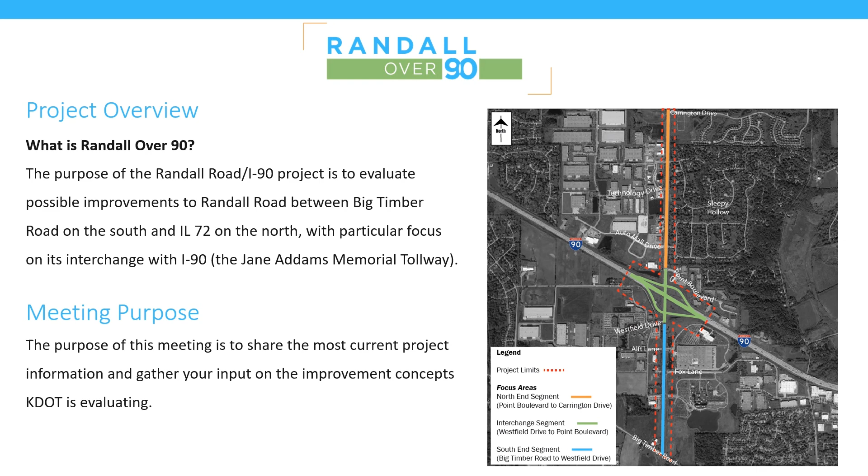The purpose of the Randall Road at I-90 Corridor Improvement Project, which we call Randall over 90, is to evaluate potential improvements to Randall Road between Big Timber Road on the south and Illinois Route 72 on the north, with a particular focus on the interchange with I-90, the Jane Addams Memorial Tollway. The purpose of this public meeting is to share the most current project information and to gather your input on the improvement concepts that KDOT's evaluating.

This project started in fall of 2019. Since that time, the project team has collected data, held an open house, and developed the project's purpose and need statement. We've also developed and are now evaluating a wide variety of potential improvement concepts. We're currently in that concept evaluation phase. We're developing a final report to publish and share later this year.

The key content of the final report will be a list of alternatives to be carried forward. This is an official term comprising a selection of our design concepts, which were found to be most successful at addressing the many needs of the corridor. Those alternatives will be whittled down to a single preferred alternative in future phases of design.

Let's go into a little bit of detail on the progress KDOT and the project team has made since that previous public meeting a year ago. Since February 2020, the project team has received and analyzed approximately 250 survey responses and comments from stakeholders and the public, including those of you who live in the project area. Armed with your feedback and with the data collected in those early stages of the project, we then developed and shared this purpose and needs statement.

Last fall, KDOT transitioned the project to what is referred to as a planning and environmental linkages strategy. That's a variation on the federal design process, which I'll explain in more detail later in the presentation. After we finished collecting our data and input and then reestablishing the project as a PEL, we began designing concepts which had the potential to identify those issues that we found, including those we learned through our conversations with you.

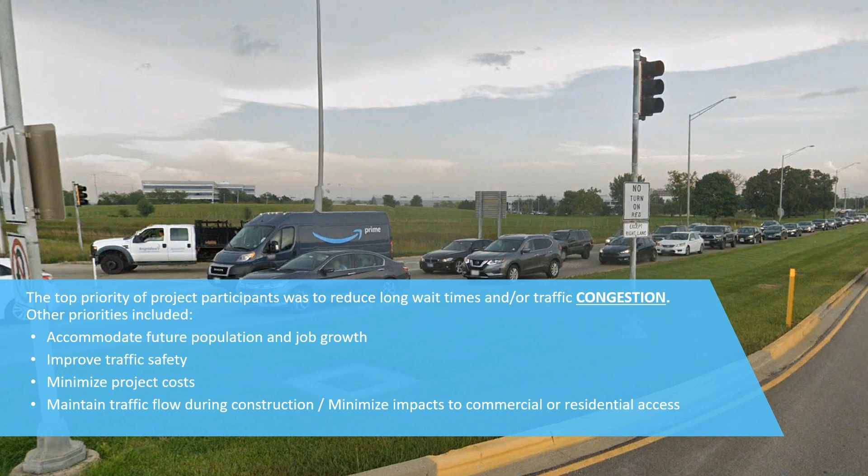Now let's dive in a little more to the purpose and needs statement which we created for this project. A purpose and needs statement is developed to define the transportation problem and outline goals and objectives. It sets the stage for consideration of reasonable concepts for improvements and provides justification for the use of public funds.

It's basically a vision statement for what we're trying to achieve. The FHWA requires a properly developed purpose and needs statement if federal funds are to be used for a project. For that reason, a wide variety of information, including public review and input, goes into developing it.

Our project's purpose and needs statement was presented for public comment in February 2020, after our last public meeting and after our data collection process was complete. You can view that entire statement on the homepage of our project website.

Just to reiterate what's in that statement: the purpose of this project is to develop one or more infrastructure concepts which enhance mobility, improve safety, support current and future travel demand, and address economic and quality of life impacts throughout the corridor. The need for this project is to relieve congestion, improve travel times, and provide for expected traffic growth.

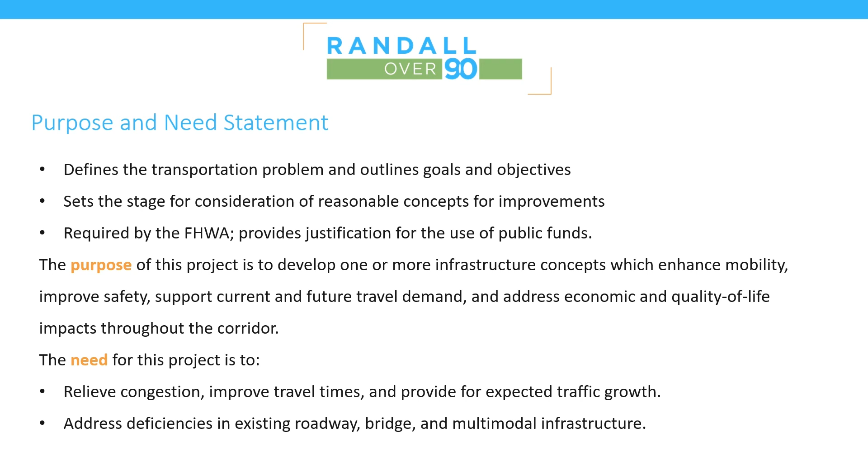This project is also needed to address deficiencies in the existing roadway, bridge, and multimodal infrastructure.

Now, last fall, as I mentioned, KDOT transitioned from a feasibility study to what is called a Planning and Environmental Linkages, or PEL, strategy. The goal of a PEL is to develop a more seamless and informed decision-making process that reduces duplication of effort and promotes environmental stewardship.

It also enhances community involvement and streamlines the delivery of the project. A PEL strategy provides us with a strong base of information for the environmental review process, which makes it easier for us to identify potential concerns early on and address them more effectively.

By making this transition now, KDOT can ultimately lower the cost of the project and shorten the timeline for both project development and environmental review.

Now, the design process had a specific starting point. We didn't want to start creating any designs until we'd finished the data collection process, which included the gathering of public input, and until we understood the corridor as best as we possibly could. It's important to have that basis of knowledge before we actually start thinking about what we would want to do.

Now, we knew from the data collection process that there were specific things we should be trying to achieve. We knew, for example, that a lot of the traffic signals, the frequency of the signals, is what does a lot to cause the congestion and backups, which in turn is a safety issue because it causes rear end crashes.

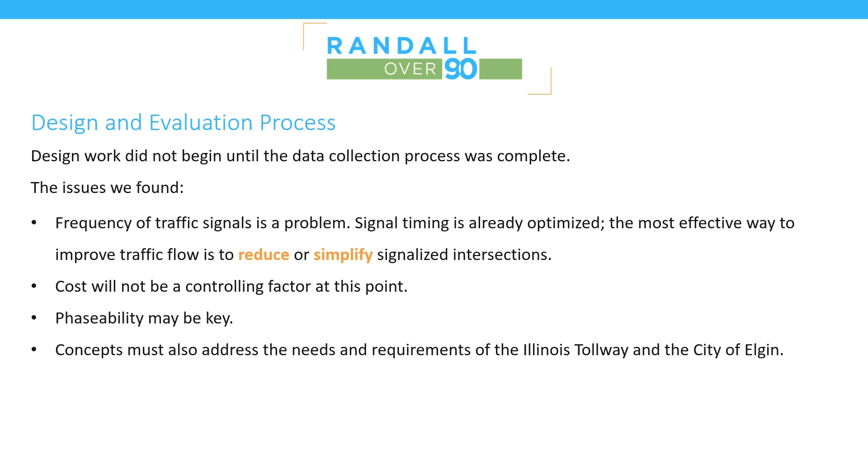Accordingly, we focused on that issue in trying to find ways to address the purpose and needs statement and make the project more effective. A thorough explanation of our approach to intersection simplification is available in our video, which is currently online, on concept criteria. Now let's go over how our team developed the concepts that you'll see today.

First, the project area was divided into 3 segments. Those 3 segments are the south end from Big Timber Road to Westfield, the I-90 interchange area, which is basically from Westfield through the interchange north to Point Boulevard, and the third segment from Point Boulevard north to Carrington Drive.

The intersection of Big Timber Road and the intersection with Illinois 72 are part of separate improvement projects currently being pursued by KDOT. Over 20 distinct improvement concepts were initially developed for those 3 segments.

Each of the improvement concepts was screened through a fatal flaws analysis. Fatal flaws are just that: things that are so severe or so impactful that anything that causes them is basically a non-starter. Residential displacements are a fatal flaw, as are exorbitant cost, major maintenance concerns, and very, very poor traffic operations, as defined for our analysis.

As a result of that screening, the design team removed 7 concepts from consideration. More information about concepts that were eliminated through fatal flaw analysis, if you're curious, is available on the project website.

Next, we created 12 weighted evaluation categories. A detailed explanation of those evaluation criteria is available in a separate video on the randallover90.com website under the heading Resources. Weights were assigned to each criterion based on the priorities they met within the purpose and needs statement. All categories for each concept were totaled for a final score. That score will be a key determination in whether a concept is retained or discarded at the conclusion of the process. Scores for concepts within each segment are only compared to others within that segment.

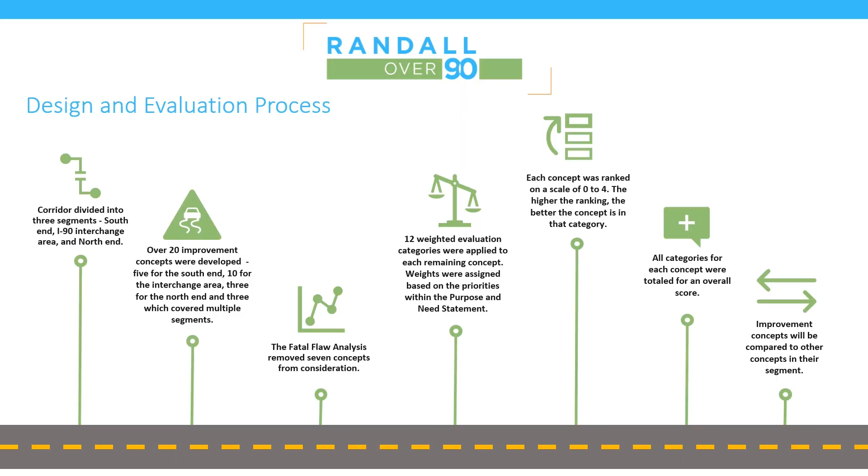So let's get into the improvements that we're actually considering. We'll start on the south end of the corridor, comprising the segment from Big Timber Road to Westfield Drive.

Let's start with what you can see out to the south end today. The portion of existing Randall Road shown generally consists of 2 northbound and southbound through lanes in each direction, with a 3rd lane northbound between Capital and Alft. This segment has several existing issues, including closely spaced traffic signals, congestion, and high left turn volumes, especially at Alft, which conflict with through traffic.

Traffic flow is further complicated by emergency vehicles arriving at Advocate Sherman Hospital, which tend to preempt the traffic signal timing and confuse things further. The average daily traffic, or ADT volume, for this segment is an estimated 47,000 vehicles per day in 2019, which is one of the heaviest, if not the heaviest, traffic volumes served by any Kane County highway. Early indications are that COVID's impact on traffic volumes here and elsewhere in the corridor has been relatively limited.

Now, one concept that KDOT must consider per federal guidelines is what they call the no-build concept. This means that no improvements would be made. It is rare, but not unheard of, for the no-build concept to be selected for a project. But for that to happen, the no-build concept would only be selected if all of the other possible improvements fail to address the purpose and needs statement.

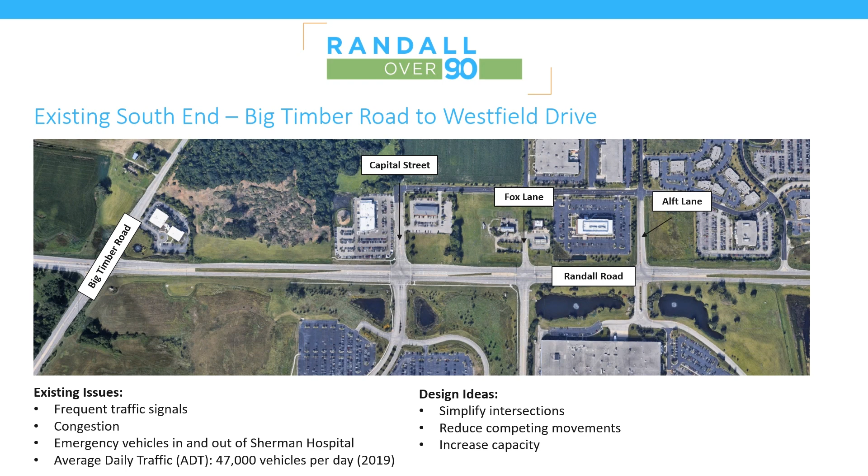In addition to the no-build, 3 improvement concepts survived the fatal flaw screening process and are still under consideration for the south end segment. Those 3 are a 6-lane cross-section, 3-leg intersection modifications, and an unusual concept at Alft Lane called an echelon intersection. I should point out that the concepts which failed the fatal flaws analysis are also relatively unusual.

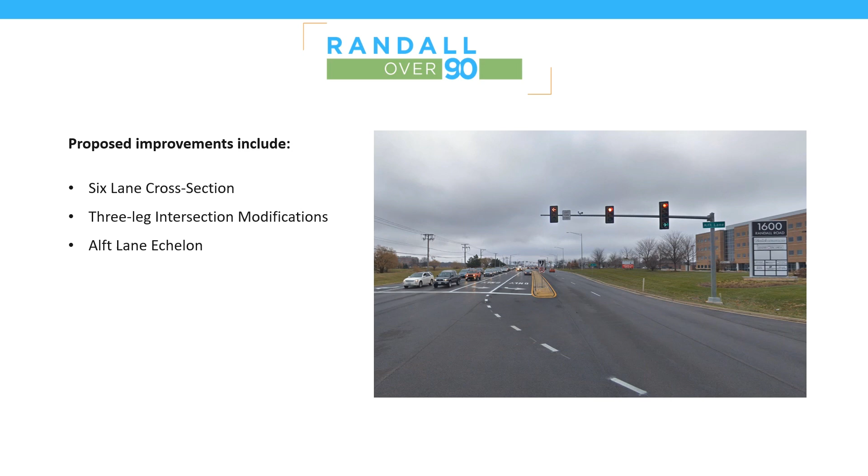Now, this narration over the next steps is only going to provide you with a high-level summary of each concept. Some features of each might not be very clear in the slide, though I'll take my time to go through them. All of these concepts can be viewed individually and in greater detail by downloading the exhibits from the project website, and I encourage you to do so.

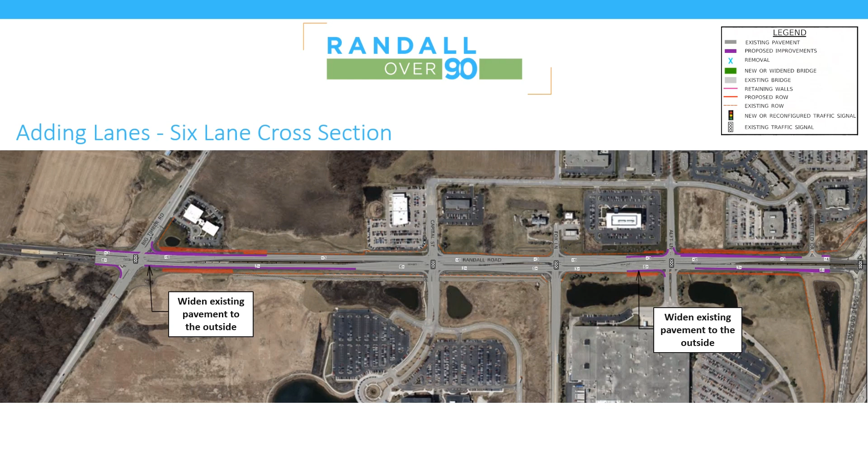The first concept we're going to look at is a 6-lane cross-section. It is the most straightforward of the different concepts under consideration. KDOT would simply add a third lane in each direction to the roadway between Big Timber and Capital Street, and also between Alft and Westfield. Turn lanes would be added, and traffic signals would be modified as needed.

Using the scoring criteria we've discussed previously, this concept was given an overall relatively low score of 43. As our traffic modeling suggests, it will not provide much additional benefit to the corridor. While additional lanes will improve capacity, they don't reduce the number of traffic signals, they don't reduce the number of other hazards currently contributing to congestion or crashes, which is why its score was relatively low.

Some other concerns we identified include the fact that the wider pavement will require long crosswalks. It is an intent of the project that we do what we can to enhance multimodal use, and a wider pavement lessens the likelihood that it will provide an attractive facility for multimodal use. There's also the fact that utility relocations will be required everywhere pavement is widened. It doesn't provide any improvement to access along businesses. It widens the road, but doesn't improve the efficiency of those access points, of those side streets, which access the businesses or Advocate Sherman Hospital. Additionally, the additional pavement will probably result in the need for additional drainage improvements.

Benefits of this concept include that it does provide some benefit in average traffic delay times. Its constructability is pretty good. Lanes can be reduced and shifted without a lot of impact to existing traffic, which allows for better construction and better traffic flow while the work's underway. This concept has minimal environmental concerns. Finally, we can widen the road and retain the pavement that we have, which will lower construction costs.

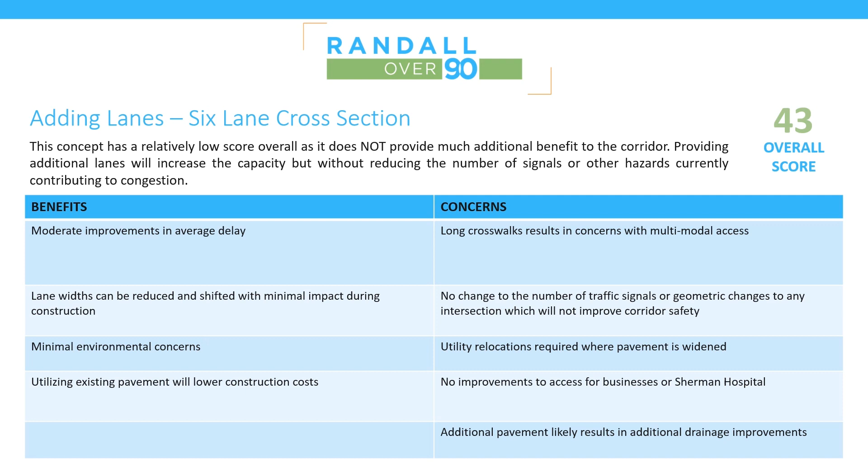Second concept I'd like to go over with you is the three-leg intersection modifications. This modification would revise the intersections at Alft Lane and at Fox Lane by reconfiguring the traffic signals at both intersections.

Under the best performing version of this concept, the Sanfilippo plant access would be via a U-turn at Fox Lane. Northbound left turns onto Alft would now use a new frontage road to cross Randall Road and make a right turn onto Alft from the north. So they drive northbound past the intersection, do a U-turn, and then make a right turn onto Alft.

As a result of doing this, the traffic signal at Alft would be greatly simplified. It would provide some additional inconvenience for the hundreds of vehicles which make that turn, but with benefit to the tens of thousands of vehicles that do not.

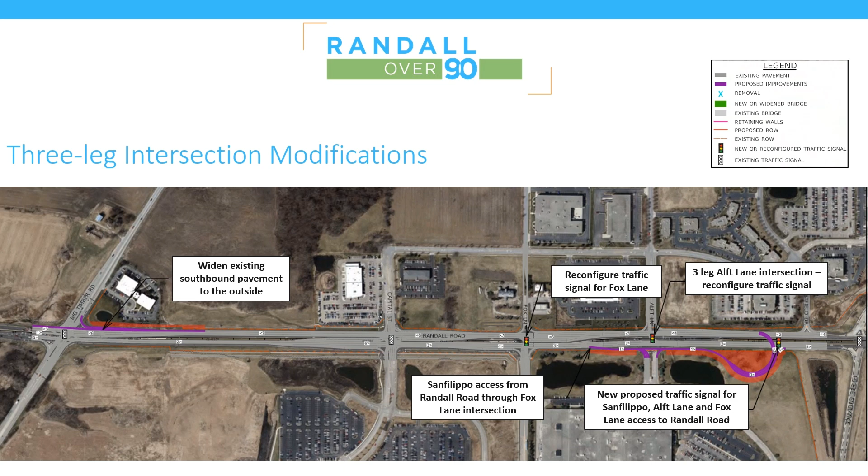This concept provides a significant benefit to the through movements, which are the focus of our study, by consolidating that turning traffic. Our modeling has determined that the two-phase signals at Alft and at the frontage road will operate much more efficiently than the one four-phase signal currently at Alft.

The improved traffic flow will improve access to surrounding businesses and the hospital, and especially for traffic turning from Alft onto Randall, as opposed to Randall onto Alft. But it does require significant right-of-way, and it does require an additional two-phase traffic signal. For more information on how that two-phase signal benefits us, I would encourage you to drop in on the traffic breakout session after I'm done speaking.

Other benefits of this concept include the fact that it provides a protected area for pedestrians to get across Randall. It enhances safety by reducing those queues which are currently forming at Fox Lane. It has minimal environmental concerns. It allows us to retain most, if not all, of the existing pavement. And finally, access to Advocate Sherman Hospital is improved with these improvements in two-phase signals.

Some concerns include the fact that we have numerous utility impacts, that we do have an issue with indirect access to the Sanfilippo plant, which will require some careful design. And finally, the amount of additional pavement we're adding will require additional drainage detention, which must be designed.

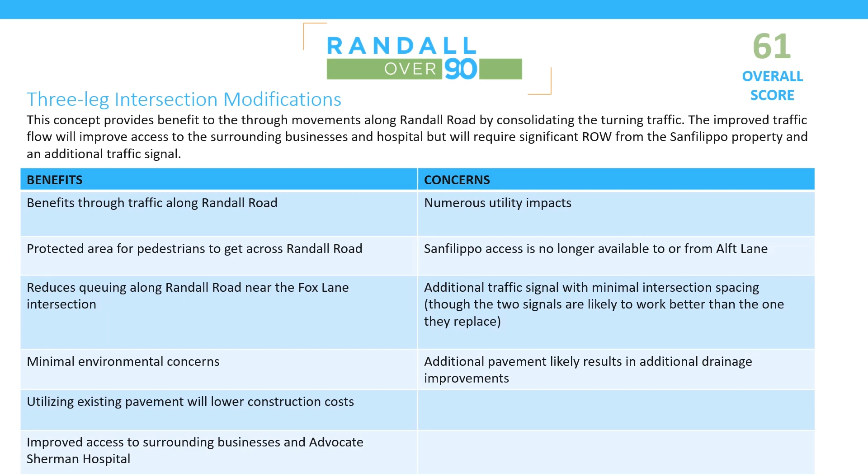The third improvement concept I'd like to cover for the south end is what we call an echelon intersection. It has a number of other names, including an over-under, if you're interested in Googling it. We're calling it an echelon. And what an echelon intersection does is it grade separates two directions of travel.

In our particular application, northbound Randall Road and eastbound Alft Lane will be raised over the existing intersection of Alft and Randall, making it essentially a double-decker intersection. Access to westbound Alft will be via a new extension of Fox Lane to the west.

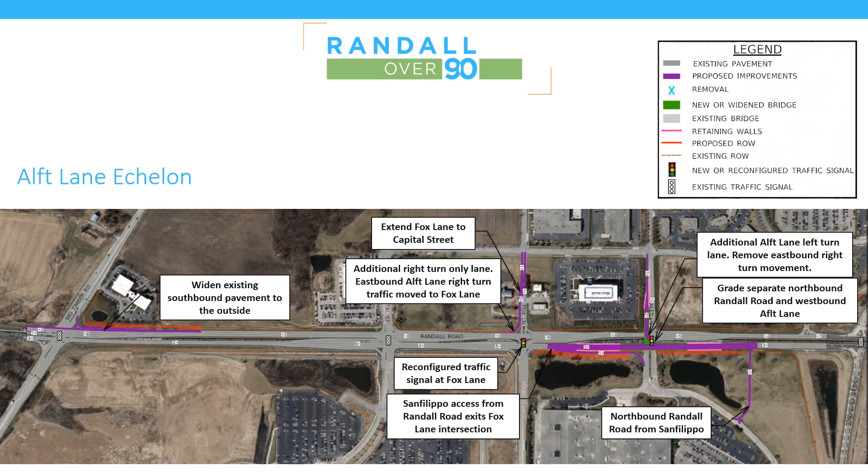This concept provides a significant improvement along Randall Road at the Alft Lane intersection. The interchange configuration, though, presents a lot of concerns. The foremost of those is that construction staging will be very complicated and disruptive in the short term. Also, the intricate bridge structure is going to create a high construction cost.

Other concerns that we have about this concept include the utility relocations, the fact that we've got an unsignalized entrance from the Sanfilippo plant, which we'll need to design carefully, and the fact that additional pavement and especially drainage for the bridge structure will result in some relatively complicated drainage infrastructure as well.

Among the many benefits of an echelon is dramatic improvements in safety and traffic flow at Randall and Alft. The movement from Alft onto northbound Randall is one of the biggest intersection movements that we have in the entire corridor. So doing something to specifically address it and specifically improve it means that this scores very highly from that traffic operations and business access standpoint.

It makes much better access for Advocate Sherman by simplifying the ground level intersection between southbound Randall and Alft. The grade separation improves the opportunity for multimodal crossing because essentially pedestrians only have to cross half of Randall to get across it. And the environmental concerns are relatively minor.

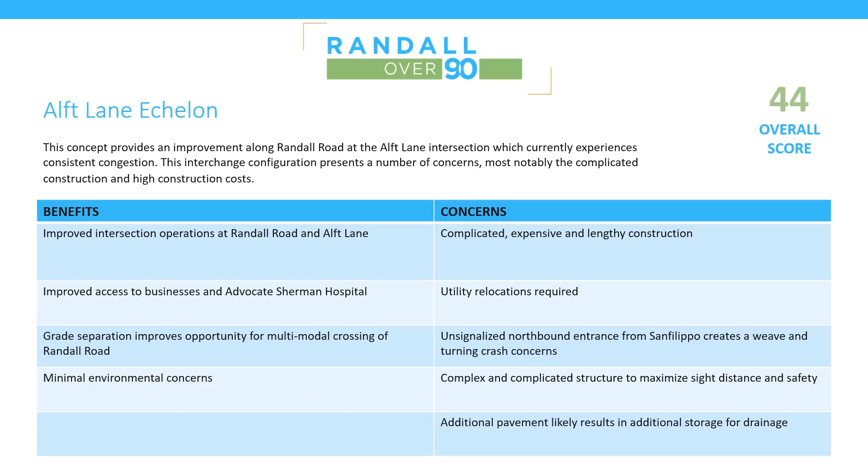As stated earlier in the presentation, all of our improvement concepts are compared to other concepts in their segment. The three-leg intersection concept scored the highest. Next was the echelon, followed by the six-lane cross section. And the no-build concept ranked last with an overall score of 44.

It's important to note that these scores do not include public input, which you will be invited to provide via our online survey. This concludes the presentation of our South End improvement concepts. You'll have the opportunity in the survey to make specific comments about what you've learned about the South End concepts, and I encourage you to do so. Let's move on to the next section.

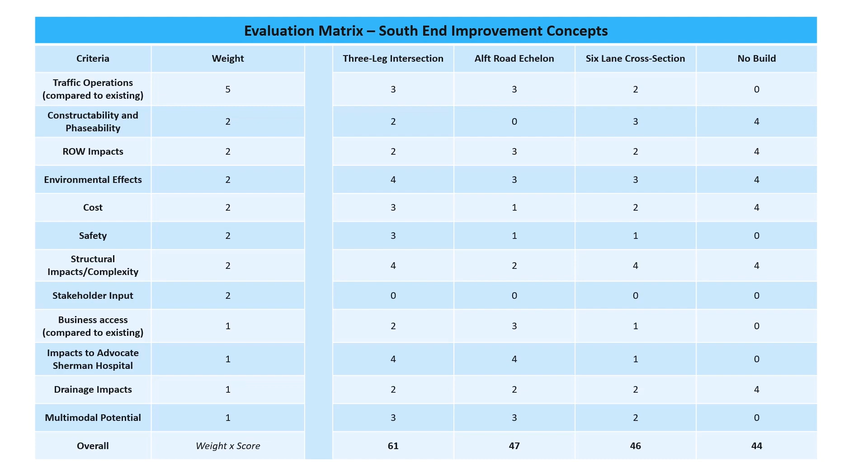We're now looking at improvements under consideration for the interchange itself. The intersection with Point Boulevard, because of its close proximity to the westbound I-90 ramp intersection, is considered by the project team to be part of the interchange segment.

So let's talk about what we have here today. The ramp is a diamond configuration. The westbound exit ramp has 4 lanes, while the eastbound features 3. Both entrance ramps have 2 lanes, which merge down to 1 before they rejoin I-90.

The average daily traffic, or ADT, for the ramps are 4,500 and 18,100 respectively. This is a very high volume for the tollway system. The ADT for the eastbound entrance ramp is 19,200. 4,500 vehicles use the eastbound exit ramp in the southwest quadrant of the intersection. Randall Road over I-90 carries 51,000 vehicles per day, the highest ADT I know of on any Kane County highway.

The existing issues for the interchange include consistent congestion, not just during peak travel times. Backups for the left turn movements from southbound Randall to eastbound I-90 and from northbound Randall onto westbound I-90 regularly extend into through lanes, which causes a higher risk of collisions. There's simply not enough space, not enough pavement to handle all the vehicles who want to make these left turns. Even the westbound exit to I-90 can back up onto the tollway main line during peak periods, especially in the afternoon.

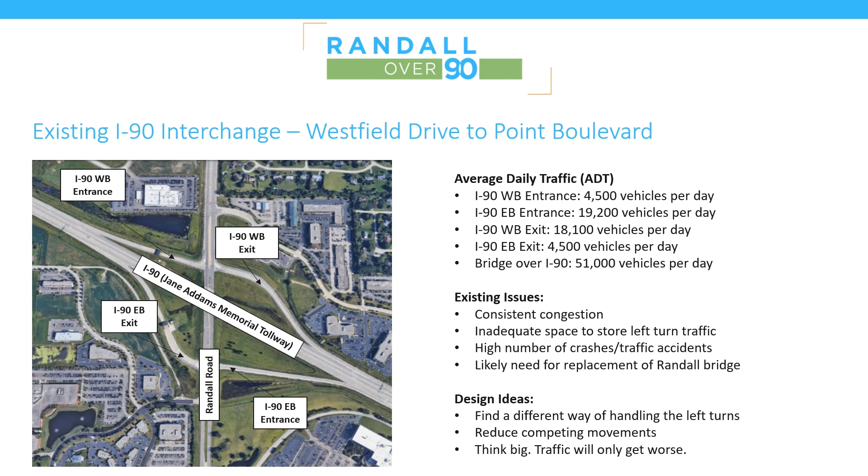For the I-90 interchange area, there are currently 8 concepts being evaluated in addition to the no build. They include the following: a retention of the Diamond interchange, a partial cloverleaf or parclo, a single point urban interchange like what we've recently built at Barrington Road, a ramp flyover, a displaced left diamond, a hamburger, an echelon, and a concept which involves express lanes and roundabouts.

This narration will simply provide you again with a high-level summary. Download the exhibits and you'll be able to look at them in much closer detail.

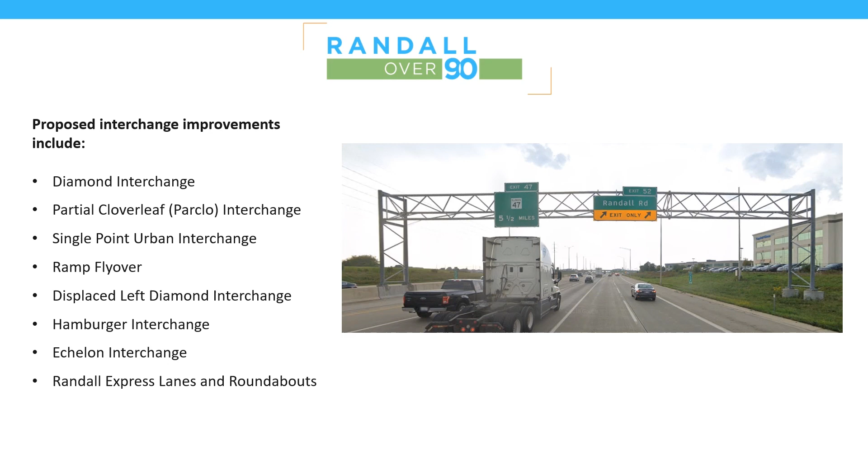We'll start with the Diamond interchange concept. Next best thing, or next most basic thing to the no build, which as noted previously is always considered until the very end of the study. This concept maintains the existing I-90 interchange configuration and simply adds a through lane to both northbound and southbound Randall Road. It includes full reconstruction of the existing Randall Road Bridge.

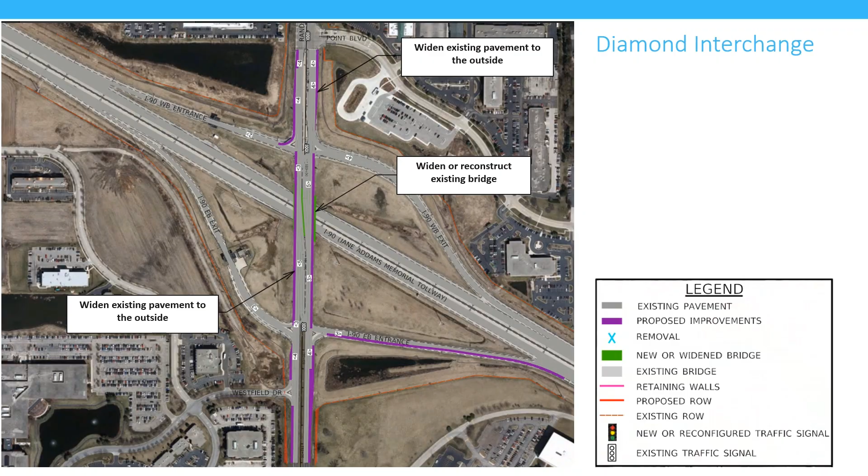The Diamond interchange concept has one of the lower scores of our interchange build concepts. Now you'll note that the number is higher than some of the areas in the south end. That's because what we're evaluating is different. You shouldn't compare the numbers for the interchange concepts to the numbers on the south end. Only consider the numbers within the interchange concepts themselves.

Now, the additional capacity which is provided from those new through lanes doesn't do a heck of a lot to address those heavy turning movements to and from I-90. Other issues we have with this concept include the retention of that current interchange geometry, which doesn't help with access to businesses or to Sherman Hospital. It doesn't address the safety concerns, and those ramp intersections remain difficult for pedestrians.

A few of the benefits which we see include a moderate improvement in traffic operations, the need for no additional right-of-way, lesser impacts to Randall Road and to the tollway during construction, lack of environmental concerns, the fact that we have adequate drainage available, and the fact that there's a possibility that retention of existing pavement results in a lower construction cost. However, as noted, it doesn't provide that transformative approach, which is why its score is relatively low.

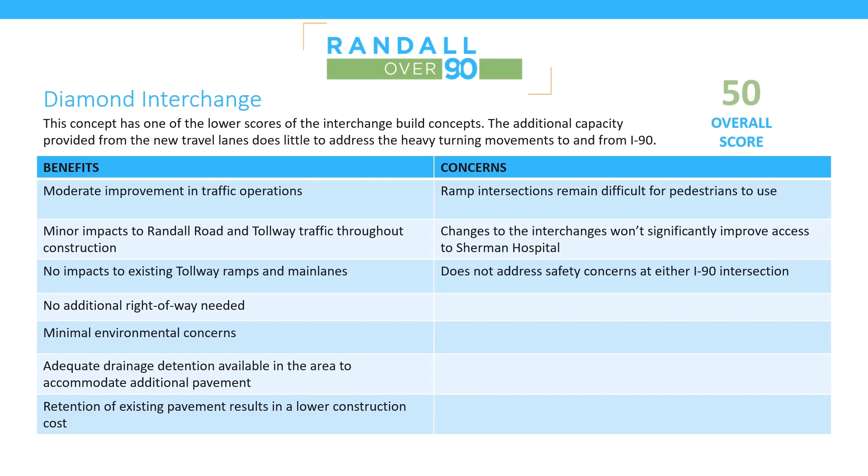The next concept I'd like to discuss is the parclo. This involves constructing a loop ramp which carries traffic from southbound Randall directly to eastbound I-90. This greatly simplifies the intersection with the rest of the eastbound I-90 ramps, which creates a two-phase traffic signal at that intersection with the eastbound ramps. The parclo does require reconstruction of the eastbound exit ramp and of the toll plaza currently in place.

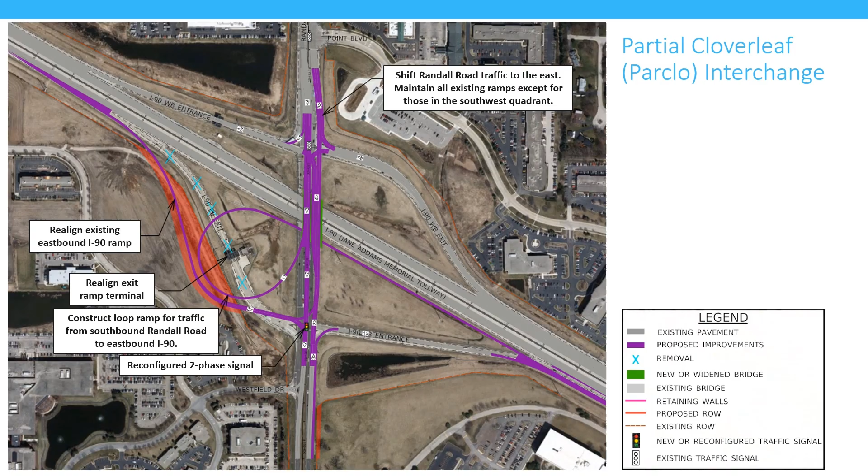The concept does eliminate one left turn, which, as we've noted previously, is our biggest problem in this segment. However, it doesn't address issues at Point Boulevard or at the westbound ramp intersection. As a result, it turns out that it doesn't provide significant improvements to the corridor.

Some benefits do include the fact that it does decrease queuing at the eastbound I-90 intersection. As noted, the southbound Randall to eastbound 90 left turn is one that frequently backs up in the through lanes. The construction of the Parclo ramp will dramatically reduce traffic at that intersection, which should have an effect on crash reduction. The environmental concerns are minimal.

It's a little bit easier to construct a multi-use path with this concept because of the way it reconfigures those left turns. And it has minimal drainage impacts. There is some disruption to the existing ground in the southwest quadrant, but it doesn't disturb those basins which provide detention storage.

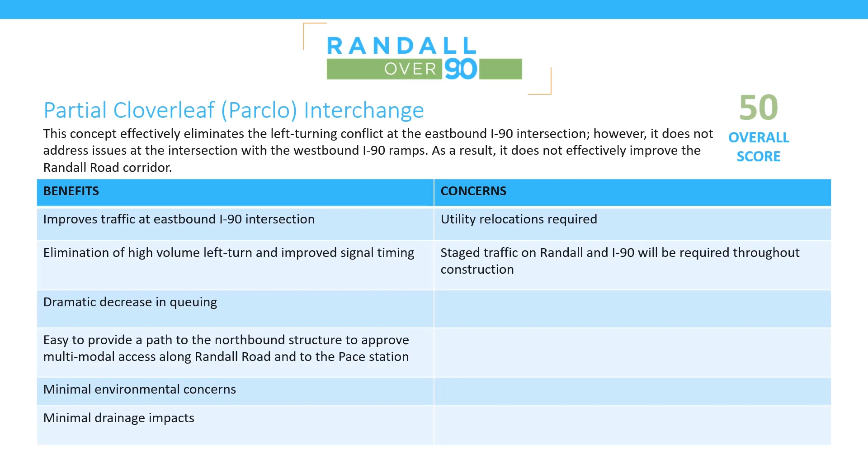The next concept is the single point urban interchange. Again, this is similar to what was recently completed at I-90 in Barrington. This improves the intersection spacing by consolidating the ramp intersections into a single location.

It improves the intersection spacing at a key point in the corridor, and it does address both the eastbound and the westbound I-90 intersections. So it does have an improvement from that standpoint. However, it has substantial issues with constructability and staging and cost.

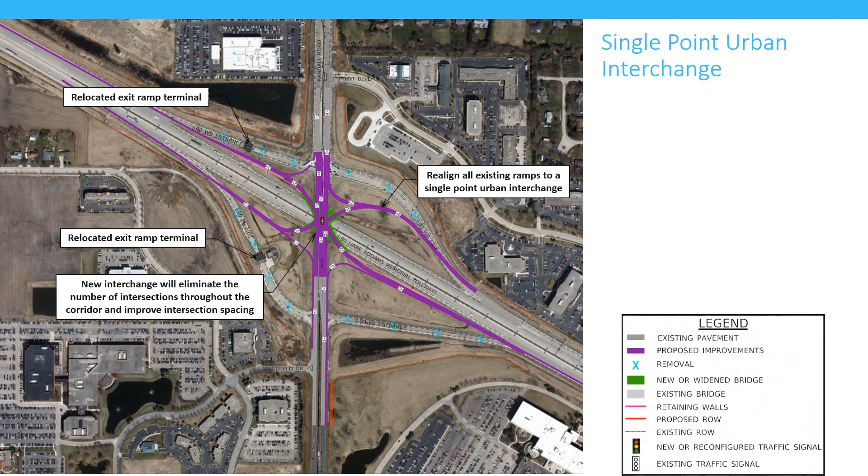Now, the other concerns for this concept are utility relocation, that complicated staging that I referred to, and substantial difficulty with pedestrian crossing. SPUI is many things, but it takes effort to make it a friendly pedestrian experience. It can be done, but it's complicated. It's a very large, very complex structure, which also makes it a challenge to maintain from the county and tollway perspective.

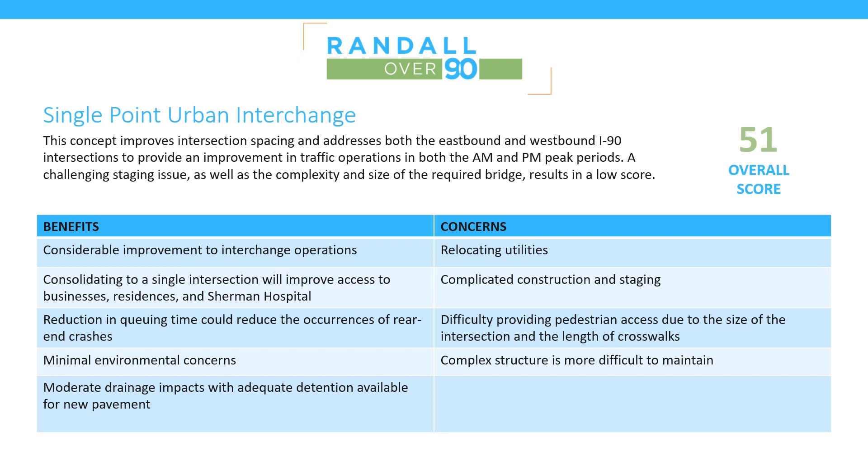The flyover concept kind of takes the Parclo and moves it over I-90. What this does is constructs a loop ramp from southbound Randall to eastbound I-90. It's similar to the Parclo, but what it does is it takes traffic off of Randall Road before the westbound ramp intersection. So traffic bound for eastbound I-90 does not interfere with traffic exiting westbound I-90. This turns out to have a significant improvement in the capacity of both of those movements. Access to both directions of I-90 will exit southbound Randall Road at the same location just south of Point Boulevard.

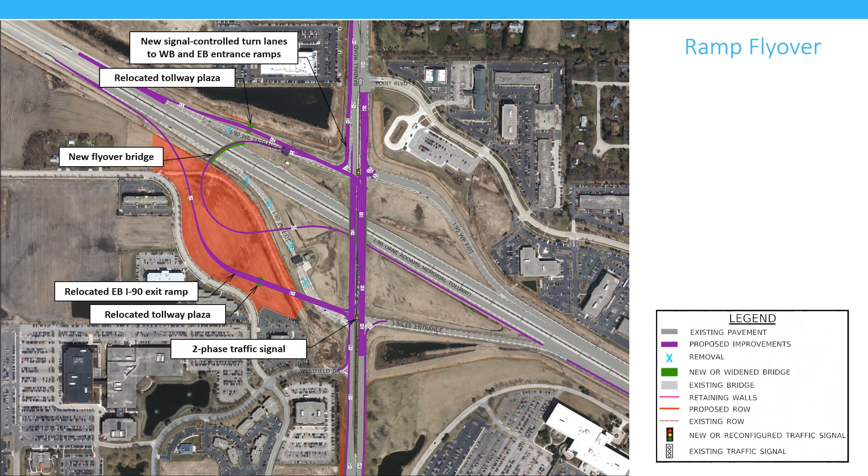This concept received a very high score. It has a dramatic improvement in peak period traffic operations, which result from the removal of those left turns, and improves the efficiency of the I-90 ramps by providing more green time for the westbound exit.

It's one of the more costly because of the new bridge and the long ramp. It has many benefits in addition to those I've mentioned. It increases Randall Road capacity. It greatly reduces impacts to traffic and improves safety. It has limited environmental concerns and minimal drainage impacts. It also allows for relatively easy construction of a good multimodal path.

Now, some concerns we have are obviously an elevated construction cost and utility relocations. And finally, and most important, the concept depends on clear direction as to how to guide people from Randall Road to the new flyover. Intricate design will be required for this roadway geometry and signing to communicate how best to use that turnoff.

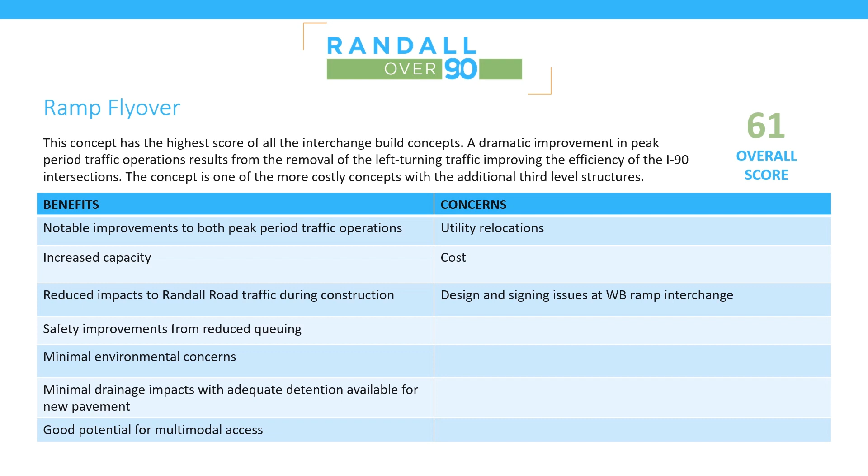The displaced left diamond. This is somewhat similar to the DDI that they recently built at Elmhurst Road and 90. In the displaced left diamond concept, left turns from northbound Randall and from eastbound I-90 are shifted to new pavement and a new bridge west of Randall Road. The concept is similar to a DDI, but the through lanes are maintained in their current parallel condition.

Essentially, what we're doing is building a third crossing of Randall over I-90 just for the left turns. This is an unusual but not unique concept. They're increasingly popular in suburban and urban areas throughout the country. Another version of what you see here can be built on the east side of Randall Road, but for reasons I won't go into, I'll leave to my traffic friends, the concept as you see it here performs somewhat better from an operations standpoint.

The displaced left diamond also received a very high score.

This conversion to two-phase signals—with both the westbound and eastbound I-90 ramp interchanges basically being converted to two-phase signals, or three-phase at most—provides a significant improvement to mobility by combining the left turn movements rather than having them go one at a time.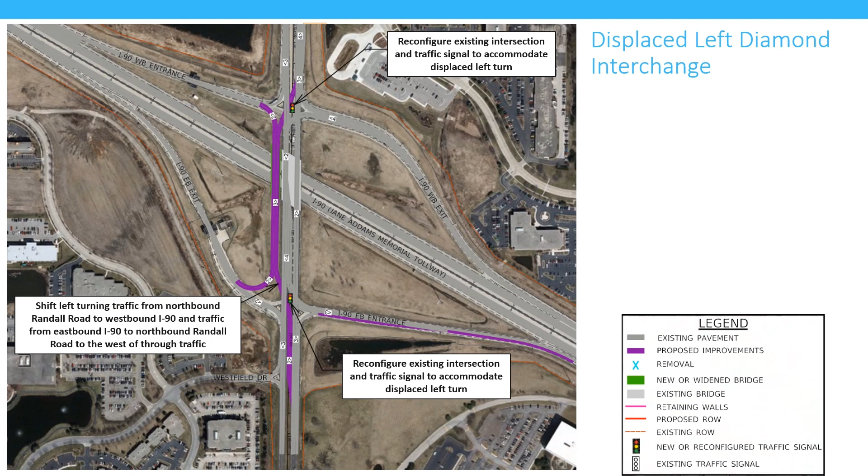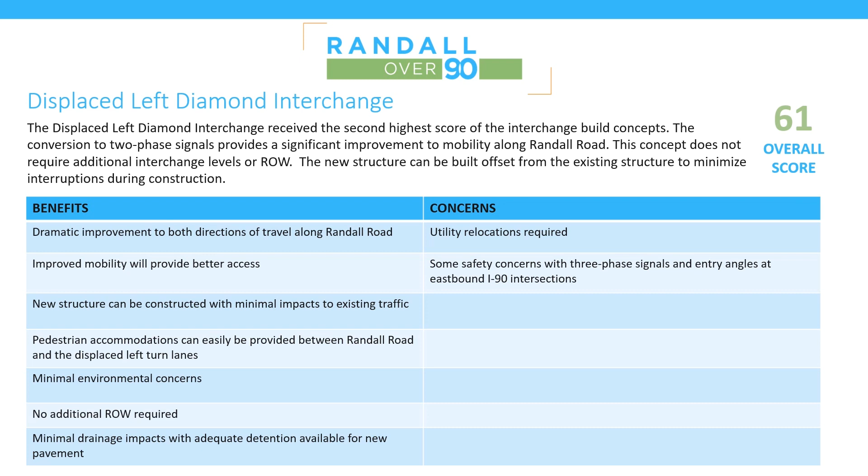The new structure carrying the displaced left turn can be built offset from the existing structure to minimize interruptions. Concerns would include utility relocations and the relatively complex intersection needed for those displaced lefts to function efficiently and safely. The next concept is the hamburger.

Believe it or not, this is a thing that has been built in a few places in the country. If you want to know where they are, I'll be happy to share those locations with you after the meeting. What we are trying to do with the hamburger is eliminate left turns by making every movement basically a right turn, kind of like a glorified oversized roundabout. This concept does not require any traffic signals, and at least theoretically should operate as free flow.

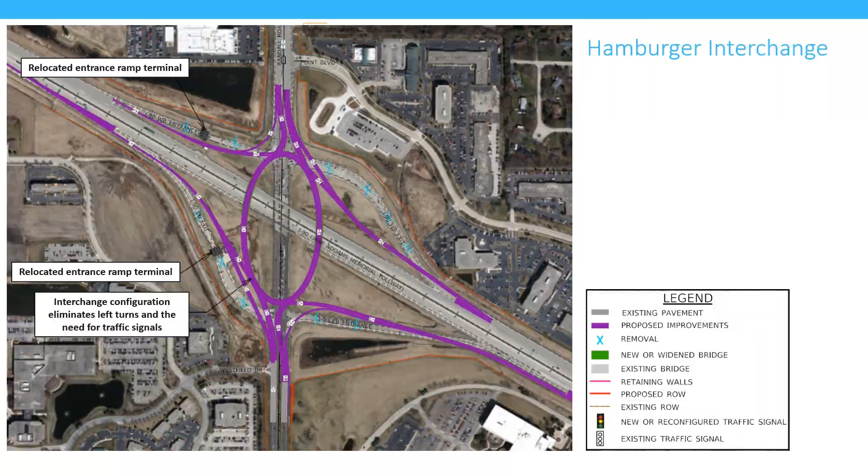However, what we found is that it received the lowest score of any interchange build concept. Traffic analysis showed that we only got minor improvement along Randall Road, which was more than offset by concerns about safety, constructability, and cost. Simply put, there's just too much traffic here for it to be reconfigured as a roundabout.

Other concerns include the fact that we still have queuing on the ramps, especially on that westbound 90 exit—substantial potential utility conflicts, safety issues due to the free flow movements, and high construction costs.

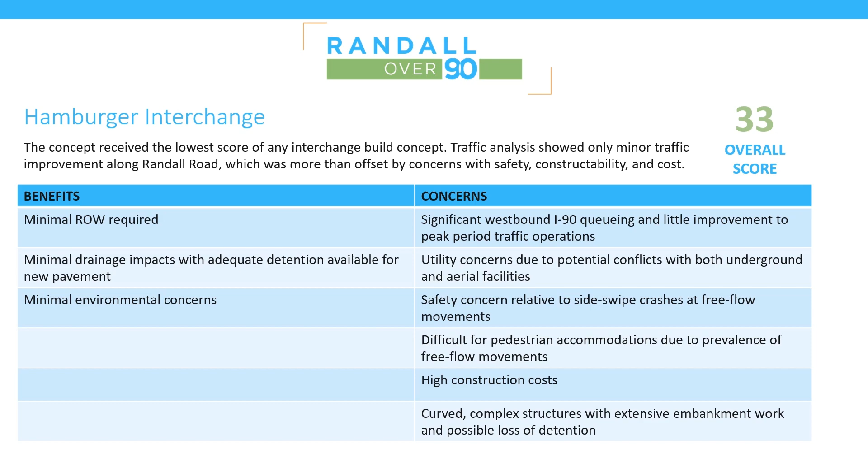The next concept is an echelon interchange. We already introduced the idea of an echelon at Alft. We tried one at I-90 as well.

Now, as noted previously, the echelon is a split level intersection. In this case, we would take southbound Randall on a separate bridge over northbound Randall and over I-90. So the access to and from southbound Randall would be at a different level from the access to northbound Randall. That means that all the traffic signals would be two-phase signals.

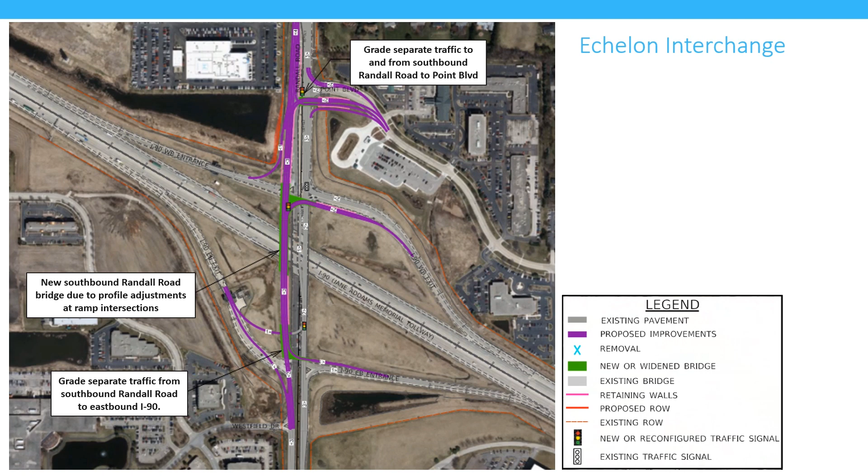We've gone to some detail to talk about how we like two-phase signals over the 3 or 4-phase signals we have now. Access to and from northbound Randall, as noted, would remain at grade. We talked about the need to reduce conflicting left turns, and this most certainly does that. This concept received the highest traffic score of anything we developed because of the dramatic improvement in operations and safety that it provides along Randall Road.

However, it has substantial constructability and bridge design concerns. The structures would be complicated. You have the issue with the ComEd utility line south of I-90, which would need to be adjusted. And it results in an overall score which is lower than the displaced left diamond and the flyover.

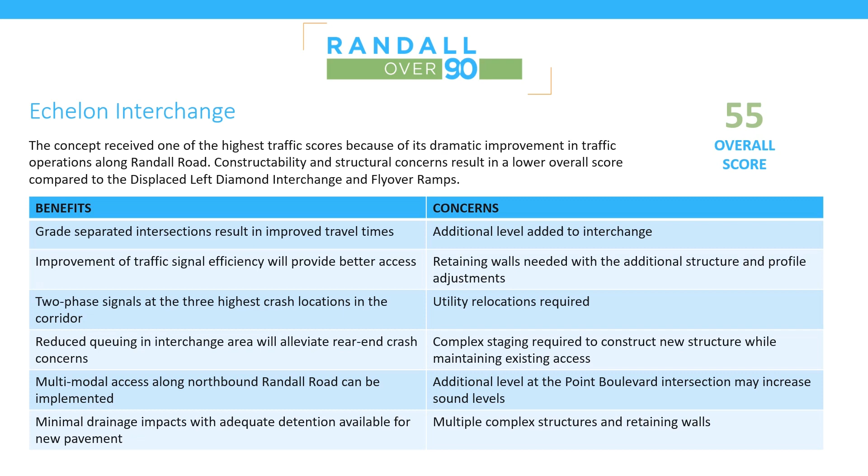The roundabouts concept includes through lanes for Randall Road, which are grade separated over roundabouts at Point Boulevard and Auto Mall Drive, which would only serve local traffic. So there'd be 2 lanes in each direction on Randall for just the Randall Road traffic, and all local access would be via the roundabouts and via frontage roads next to the express lanes.

The roundabouts would only handle local traffic, which we've determined would allow them to function very efficiently. Access to I-90 from the north would be via local lanes. The roundabouts concept ideally would be connected with the parclo or the flyover to make it function efficiently.

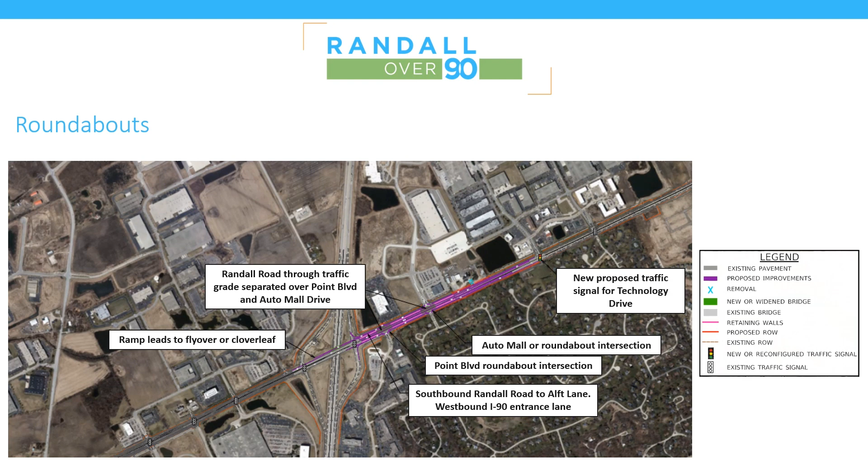This concept also received the highest traffic rating, but many concerns in other areas led it to result in one of the lowest overall scores.

There are many concerns about this potential concept, which include that right-of-way would be needed on one and possibly both sides of Randall Road north of I-90, extensive utility conflicts, complicated construction phasing, difficulty in providing for pedestrian access, noise concerns, high construction costs, and 2 new multi-lane roundabouts in close proximity. Not that a roundabout is that exotic of a concept anymore, but 2 multi-lanes in close proximity are a little more complicated.

Now, this is an example of the approach that the design team took. We tried to focus on a specific issue and develop the thing that would best address that issue. The roundabouts concept is trying to address traffic flow, and it does that, but it also has all these other impacts, which our evaluation process helped us to understand made it less desirable than it would be if we were only looking at traffic.

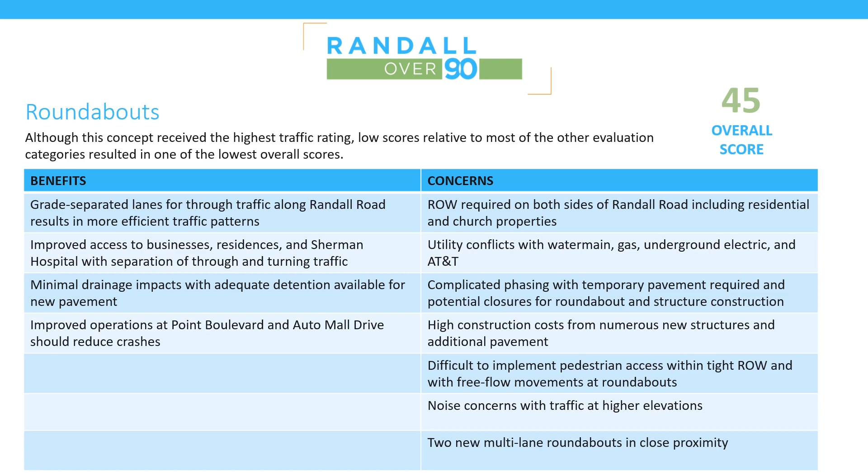So summing up all the scores, of the 9 concepts we've just gone over, the displaced left diamond, the flyover, the echelon, and the single point urban interchange were the ones that scored more highly.

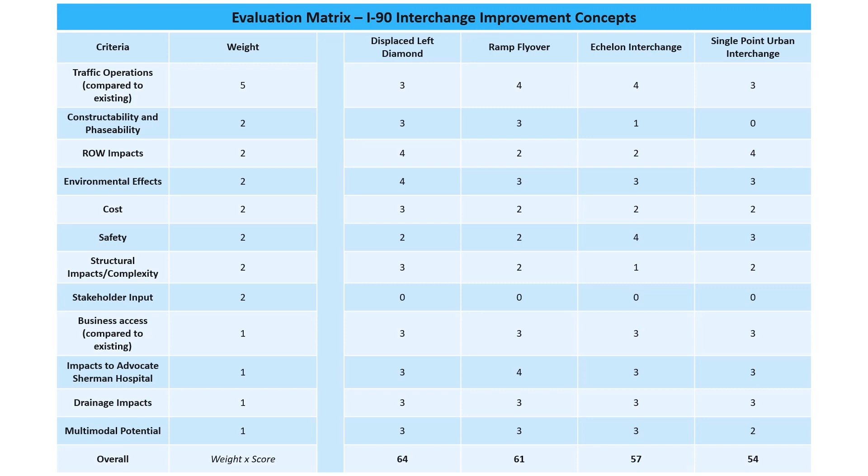Lower down in our rankings were the Parclo, the existing diamond interchange, the roundabouts concept, and the no build, with the lowest score going to the hamburger.

As noted previously, these scores don't include public input. Please be sure to rate all of these concepts 0 to 4 based on how well you feel it meets the needs of the project. We don't know at this point where the cutoff will be on whether we retain or eliminate a concept.

Now, you may notice that a DDI, like what was just built at Elmhurst Road, is not on this list. Several of you in 2020 mentioned it, and we certainly gave it a look. The reason you don't see it here is because the concept was eliminated as part of the fatal flaws analysis. To be honest with you, I was kind of surprised that happened. You can see an explanation for why it was called fatally flawed in our fatal flaws documentation on the project website, or you can ask us about it in the traffic and geometry breakout session after this presentation.

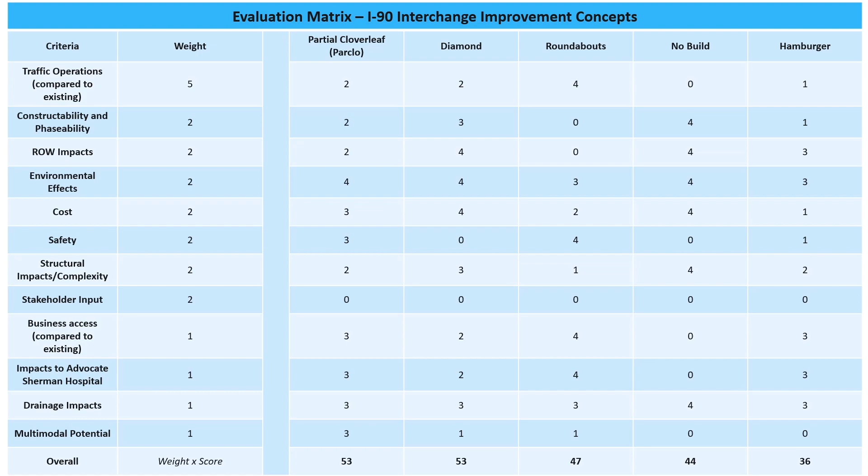That concludes the presentation of the interchange improvement concepts. Let's move on to the north end.

Randall Road has 2 northbound and southbound through lanes in each direction, except for a short segment of 3 northbound lanes from I-90 to Auto Mall Drive. Turn lanes are provided for most of the turning movements off of Randall Road. Like everywhere else in the corridor, pedestrian accommodations are limited or non-existent. This segment has frequent traffic signals at the south end, which contribute to congestion in this area. Backups caused by these intersections can cause backups thousands of feet long in this segment. We've certainly seen backups caused by I-90 congestion or Point Boulevard congestion extending all the way to Carrington and beyond. The ADT for this segment is 45,000 vehicles per day. Again, a very high volume.

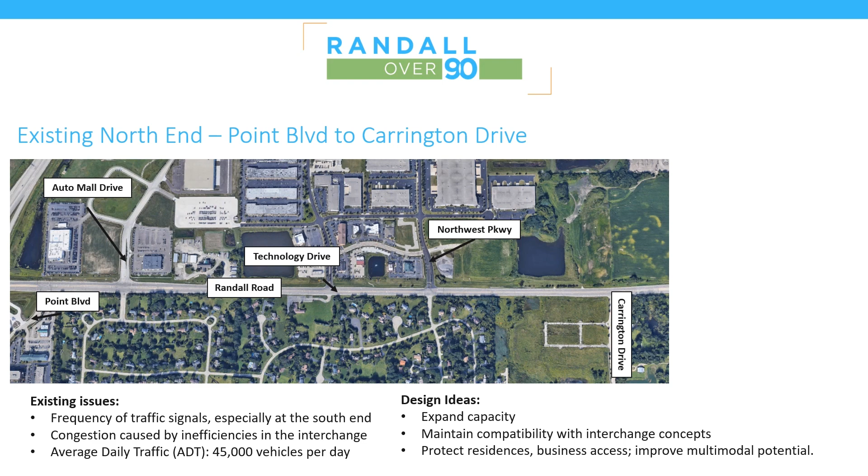Our approach to this segment was somewhat limited due to the physical constraints. We obviously have a very tight right-of-way line on the east side, which we're doing our utmost to maintain. We're seeking to increase the capacity of this segment while still maintaining that ability to tie into the various interchange concepts. So a lot of the focus for improvement here involves things we're trying to do at the interchange and things that are being considered now at Illinois 72. We also looked very hard at ways to mitigate impacts to the residential community to the east, to maintain or improve the quality of business access, and to provide space for possible multimodal improvements within and especially across the corridor.

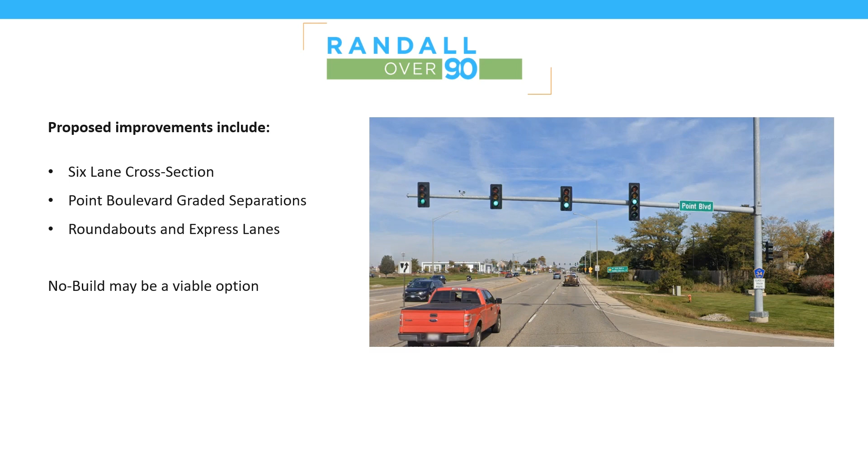The proposed improvements for the north end segment include a 6-lane cross section and an idea involving a grade separation at Point Boulevard. The roundabouts and express lanes concept in the interchange segment, which I've already previously gone over, applies to this segment as well, with a potential bridge over Auto Mall Drive as part of the design. The no build concept is, as always, a possibility, as most of the issues in the segment are caused at its north and south ends. As noted previously, some features of these concepts may not be visible in the slide. Please download the exhibits, give it a closer look, and come back and see us with any questions you might have.

The 6 lanes concept would simply add a northbound and a southbound continuous lane to the roadway between Point Boulevard and Carrington Drive, where it would probably tie into planned improvements at Illinois 72. A new signal will be installed at Technology Drive in this concept, and the signal at Northwest Parkway will be replaced. A signal installed by others is expected for the intersection with Carrington.

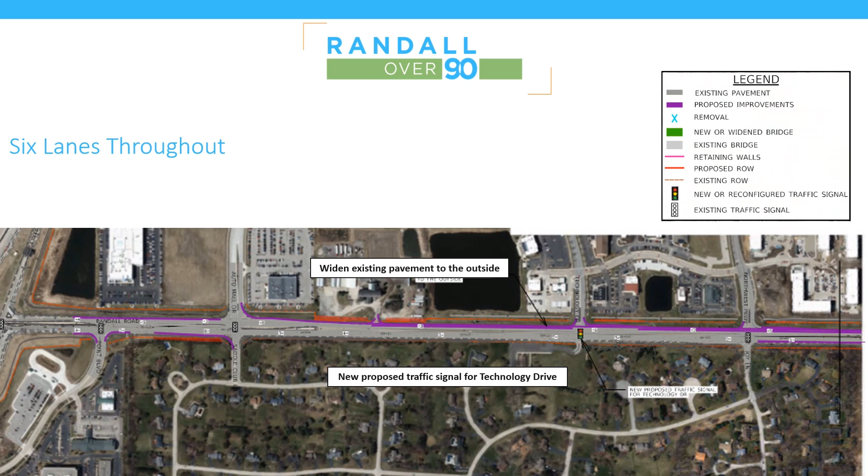This concept offers significant improvement to the no-build concept. It improves southbound performance, particularly during the morning peak period. Mobility through the corridor is improved. However, safety benefits are somewhat limited in a section of the corridor which does have a high frequency of crashes. It is believed that additional drainage detention will be needed to handle the runoff created by additional pavement.

Some of the benefits this concept offers is that it does reduce average delay. It does improve access to the business community by providing a signal at Technology Drive. During construction activities, existing lane widths will be reduced and shifted with minimal impact to existing traffic flow.

Let me go real quick back to that point about Technology Drive. One of the nice things about the corridor, and you can learn more about this if you go to the safety and structures breakout presentation, is the fact that while rear end crashes are a big issue in the corridor, turning movement and angle crashes generally are not. The reason is that most of the intersections in the corridor have what they call protected only phasing. That means you can only turn left when you've got a green arrow.

This does create more delays for those movements, but it provides a much safer environment for the driver because you have fewer situations where left turn traffic is crossing the path of through traffic. Technology Drive is the only intersection in this corridor which doesn't have that phasing, so implementing it gives us the opportunity to improve one of the rare crossing movement crash issues we have while still providing that additional access.

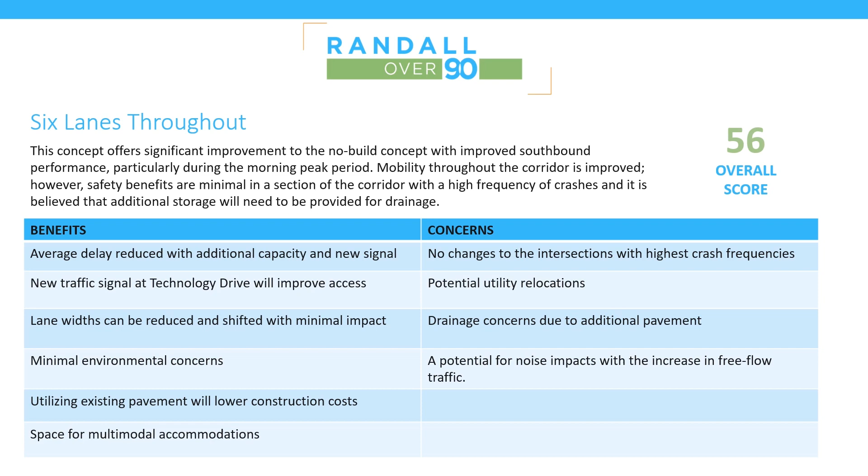I do see a question about access from Point Boulevard to McLean. I'm just about to go into that, and that's this concept here: a grade separated intersection. What we considered in this concept is the idea of simplifying the number of intersections by reducing access at Point Boulevard and taking it up and over Randall.

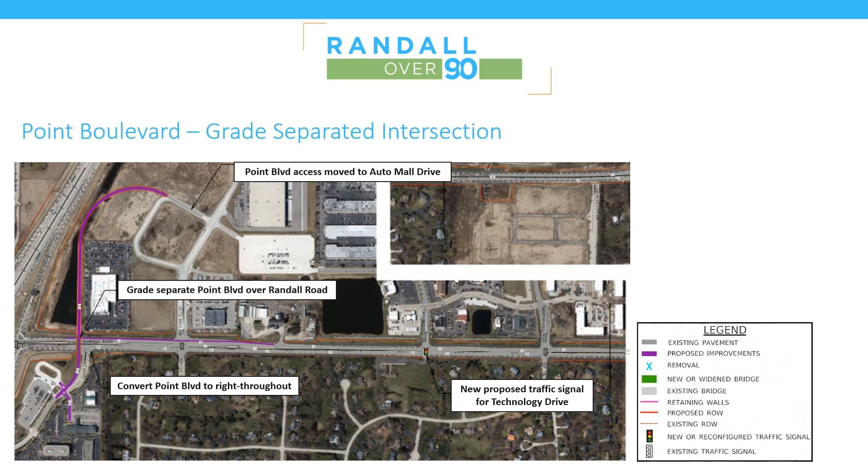What this does is move traffic from Point to Auto Mall Drive. The existing intersection at Auto Mall is very large and somewhat underutilized. This concept includes widening Randall Road, already discussed, along with a new traffic signal at Technology. The idea was to eliminate those left turns onto and off of Point Boulevard by moving them to the large and underutilized intersection at Auto Mall.

The concept does provide an improvement in intersection spacing. However, it doesn't end up making much of a difference in traffic flow because we still have the proximity of the Auto Mall and westbound I-90 ramp intersections. As a result, it didn't score highly.

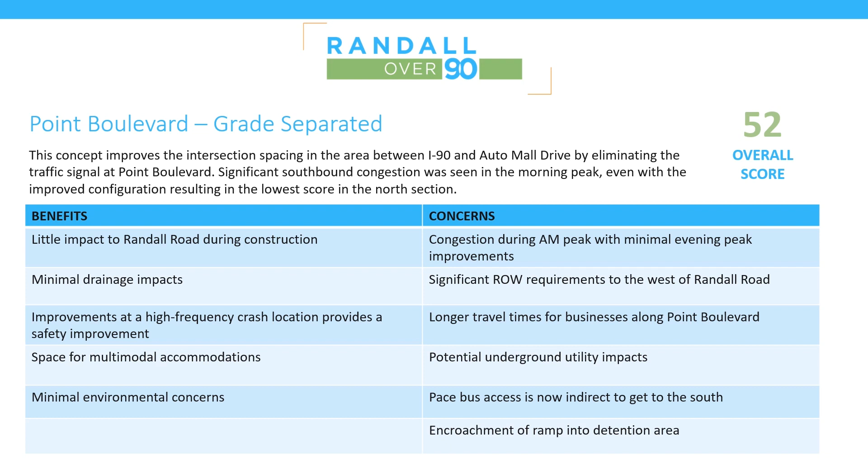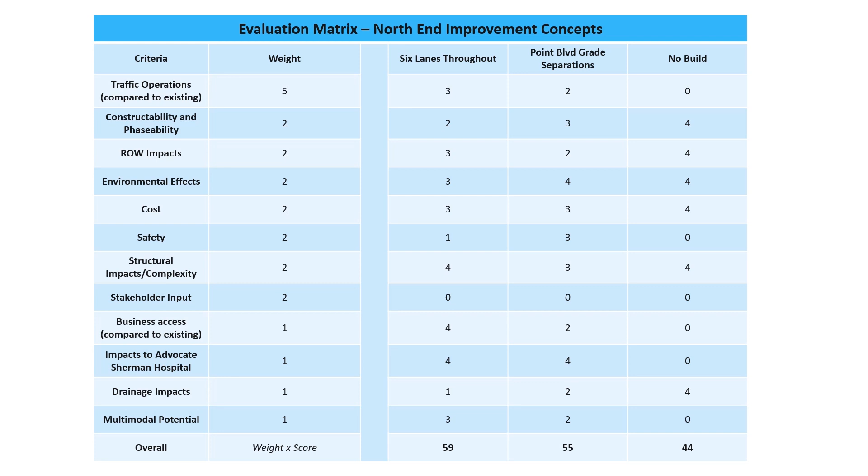So this concludes the presentation of North End concepts.

That's a lot of stuff. I know it is. I've been working on it for a long time, and it still feels like a lot. I really appreciate everybody who's been paying good attention, who's been listening to what we've had to say, and has picked up all this information. Like I said, it's a lot. I want to emphasize that all these sessions will be available via video if you want to go through them again later at your own pace and on your own schedule. You can always email us to follow up with questions after the meeting.